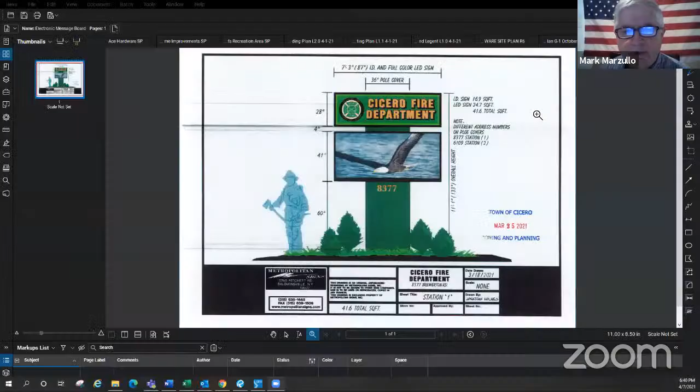Perfect. So that's a description of the sign, a visual of the sign.

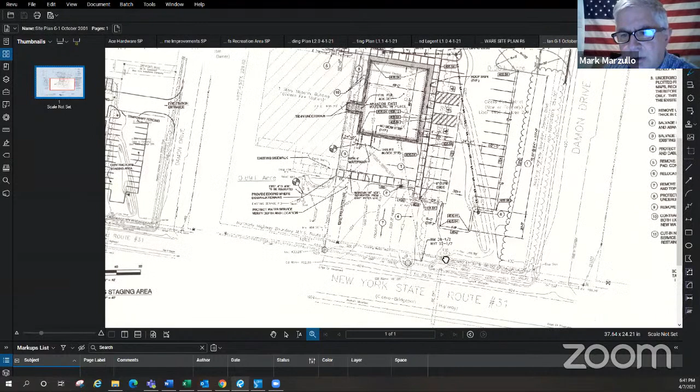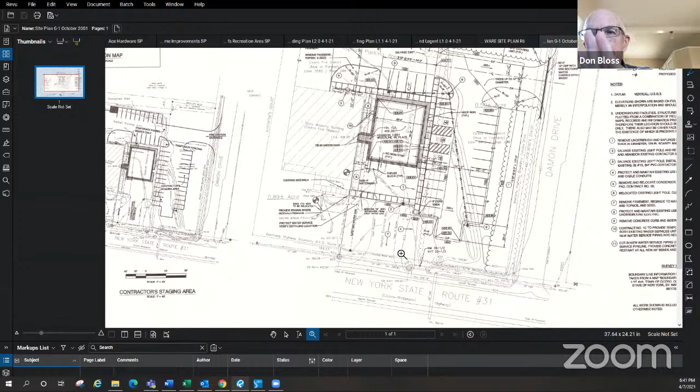Yeah, but is that Route 11? No, no, this is 31, the Route 31 Fire Department, the one over by Thompson Road. Yes, yeah - oh, wait, where Damon should be, excuse me, I was thinking of the fire barn on Route 11 and 31. Now I realize Damon Drive, that's the fire barn. I apologize, it's on Route 31.

No worries. Mark, can you point out where the existing sign is? It's in that plan - oh, right here. Darker - there you go, you found it.

Right there, okay, for an interval of less than 15 seconds there will be no flashing, oscillating, or scrolling of messages. The sign may be internally but not externally lit.

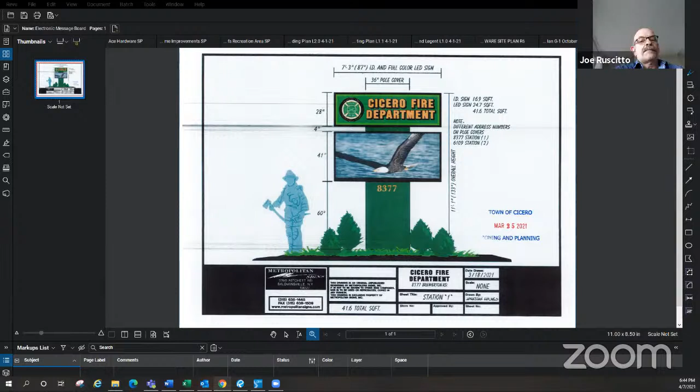Do we have a motion? Somebody like to make that a motion? I'll make it a motion. Do we have a second? Second by Snyder. Mr. Ruscitto, yes. Mr. Abbey, yes. Mr. Snyder, yes. Mr. Bloss, yes, and I vote yes.

John, you're all set. Just a quick question - Chuck brought up, if we were to redesign that top part and just include 'volunteer,' we're going to make a SEQR determination, and then I would anticipate a recommendation to the town board on the zone change.

The board has all received the Part 2 that was completed by Mr. Jermaine. Are there any questions? The matter has been determined to be a Type 1 action, and the applicant has completed a full environmental assessment form. This board, in accordance with its role as lead agency, has completed an investigation as to whether or not the proposed zone change may have a significant adverse impact on the environment as defined by SEQR.

And has been presented with and reviewed the proposed findings as set forth in Part 2. At this point, you would move for the adoption of a resolution approving the adoption of the findings as set forth under Part 2 of the full environmental assessment form, identification of potential impacts as presented to the board. Said Part 2 findings as presented shall be included in the record of this proceeding, and the town clerk...

So now our objective is to declare either a positive or a negative deck on this. That's correct, those are our only two options. We can't do a conditional.

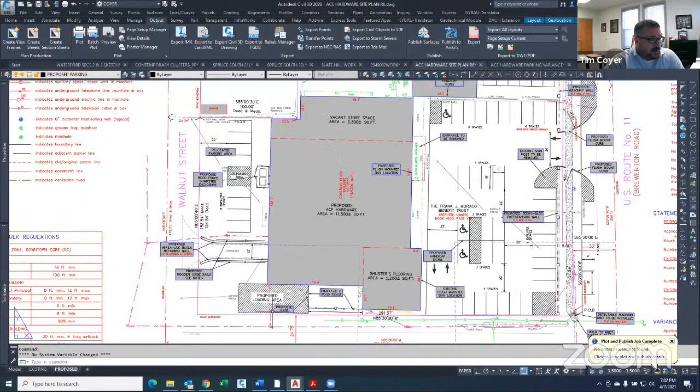After the previous meeting, we had a couple of comments from the board about the parking area in front of the dumpster enclosure in the back, so that the dump trucks can get through there without worrying about people parking in the way. We changed the location based on the changes we made.

We did talk to the state DOT about the proposed sidewalk out front. I sent them two options, and the existing curb was okay. I sent them the option of putting the sidewalk here because right now, where we have the sidewalk proposed in this plan, it goes through private property. The applicant's private property has an 8-foot jog here, it cuts out here and comes around, so I knew that would be an issue to deal with the state DOT.

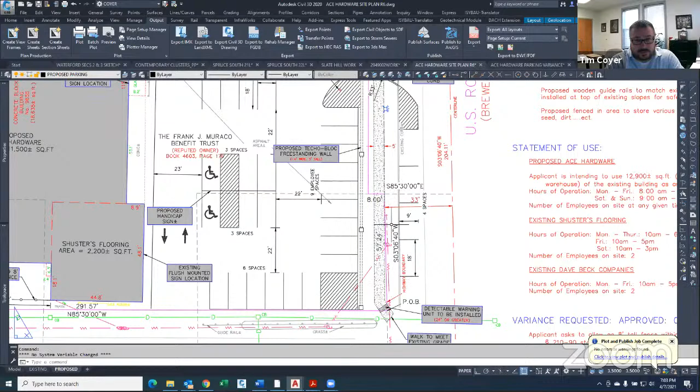So at first we sent this one outside the private property so we wouldn't have to deal with that problem with this option. However, the problem we're going to run into if this is where the sidewalk goes is we'll have to dedicate this to DOT. So even if this were approved, we wouldn't be able to start construction on the concrete walk out front until roughly a year from now, because we'd have to give this property to the state prior to any construction.

So that was the applicant's only concern: if a year from now when we go to start doing this, could we relook at the time frame for doing all those proposals in this area? I don't think it makes sense otherwise. The plan is to start this construction work within a reasonable amount of time.

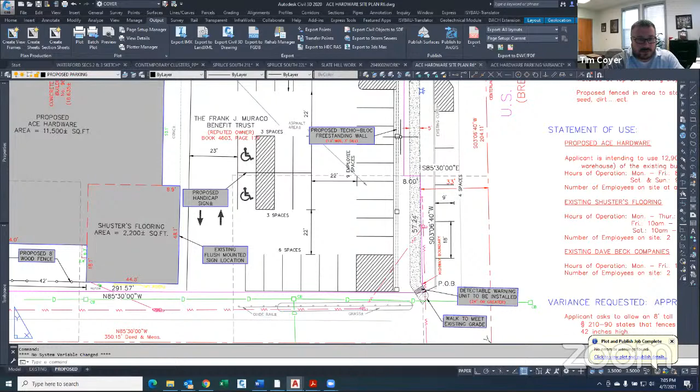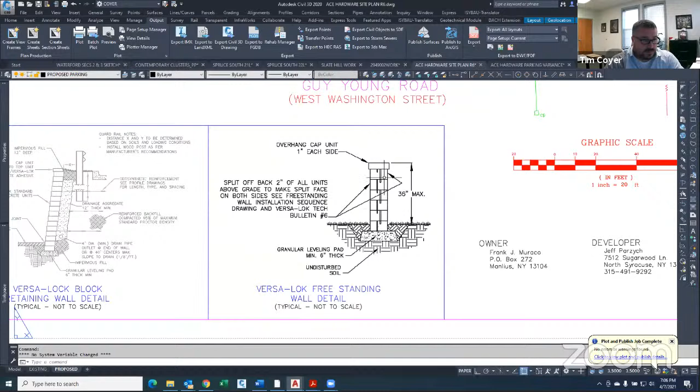One other change I didn't mention: I added details for the retaining wall out front. The original plan we sent in last week had a different detail for the wall running along Brewerton Road. It was brought up that the original wall didn't have interlocks through the wall courses, and it might not be structural enough to withstand plowing and similar stress. So our applicant talked to Northern Nurseries, explained the situation, and they suggested these interlocking reinforcements inside the blocks. They said it would be strong enough to hold up that type of wall at the existing ramp.

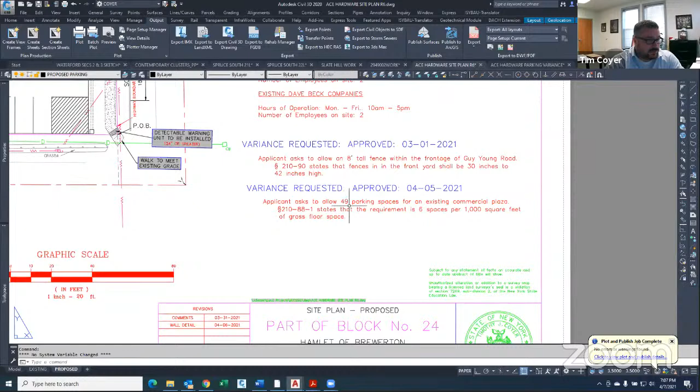I believe we finally got approvals Monday night, specifically for the two parking spaces down to 49, after we redesigned what we show on site. So that's been cleaned up as well. I believe that addresses all the changes to the map at this point.

Does the board have any questions for us? We'll open it to questions. Mr. Ruscitto?

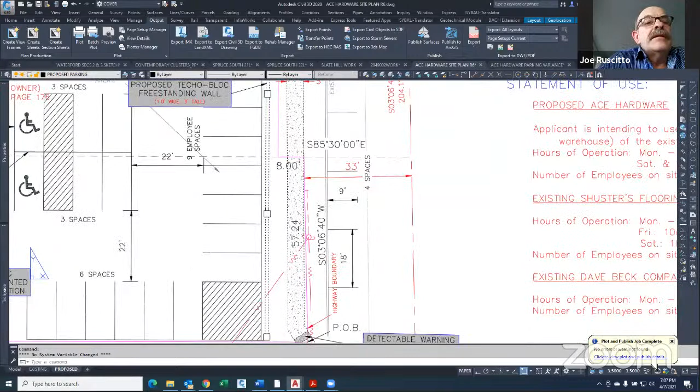The sidewalk, either way it ends up going, will it meet the hamlet's restrictions, since it falls in that gray area, so to speak? Does that meet what they want? As far as the sidewalk goes, there was a proposed sidewalk. I'll pull the regulations, but if I'm not mistaken there was a wooden post fence in there. Okay.

Mr. Abbey: the Hamlet of Brewerton's getting a nice hardware store and a nice update for that corner.

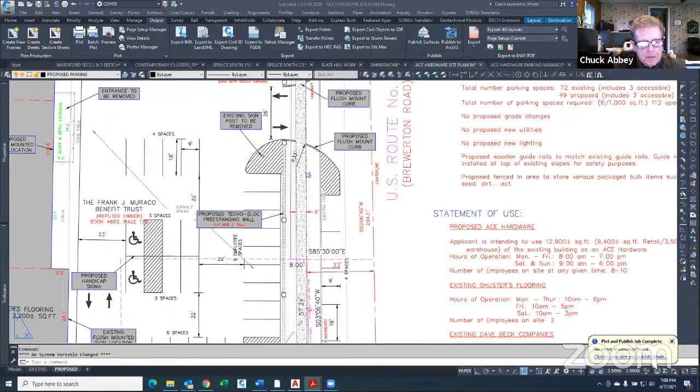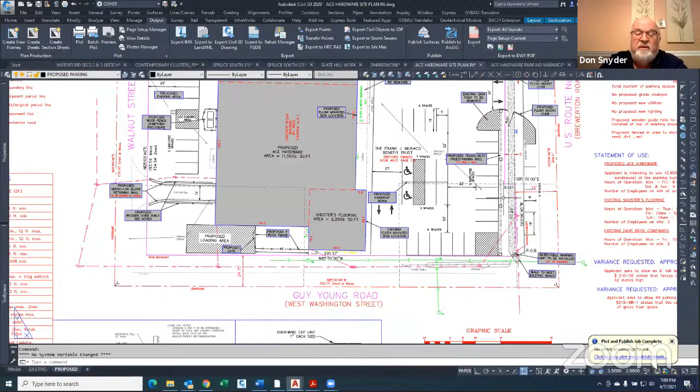Mr. Snyder: the loading dock in the back is fantastic, super. I really appreciate the way you've taken that by the hand. I don't have a problem with the sidewalk. If there's some way we can word the approval that is comfortable to Neil and to Steve, then I have no problem with the sidewalk either. So good job, thank you, Tim.

Mr. Bloss: I don't have any issues. I think it should be good to go. I like what they're doing in the village, and I'm all for it.

Thank you. Mr. Maurizio: I really like this project, so best of luck to you, Jeff.

Thank you, Michael. Mr. Procopio: I'm all set. If there's any question regarding the sidewalk, fashioning an approval to give them time to do that, I'm fine with that.

Great, Mr. Parrish? Yeah, I did send out a letter on this just as the meeting started. I thought I'd sent it out previously, but I hadn't. But I think between the board and Tim, they've really touched on any of the outstanding issues noted in there. So yeah, I'm good with it, and I would also be supportive of fashioning an approval that would, one, give the applicant time to negotiate with the state DOT to dedicate the land needed for the sidewalk construction. And once that's completed, revisit with the town the schedule for potentially the town or state undertaking those improvements, eliminating that from the project if it seems imminent.

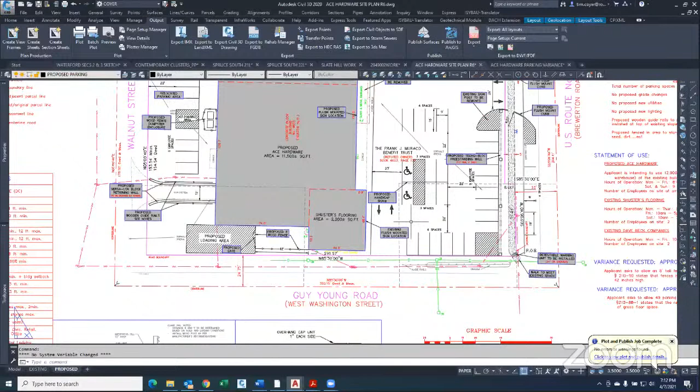Mr. Ruscitto, would you do the standard SEQR, please? Yes, I propose a standard SEQR, a form of motion. Do we have a second? Second, by Mr. Bloss. Mr. Ruscitto? Yes. Mr. Abbey? Yes. Mr. Snyder? Yes. Mr. Bloss? Yes. And I vote yes.

SEQR passes. Neil, would you propose a motion for approval, please?

I move for the adoption of a resolution approving the application known as Just Parzik, Brewerton Ace Hardware, 9655 Brewerton Road, proposed hardware store. This approval is strictly conditioned on the following: one, the color schemes, renderings, and elevations as presented by the applicant to the planning board shall be incorporated by reference into the site plan and the board's approval thereof; the actual project must substantially conform to the items as presented. Two, the board notes the applicant has explained they'll need to negotiate a dedication of the sidewalk area with the DOT, which may take additional time before constructing the sidewalk. The town will revisit the sidewalk issue with the applicant should the state aid in said improvements.

Would somebody like to make that a motion? I'll make that a motion. Motion by Mr. Ruscitto. Do we have a second? Second, by Mr. Bloss. Mr. Ruscitto? Yes. Mr. Abbey? Yes. Mr. Snyder? Yes. Mr. Bloss? Yes. And I vote yes.

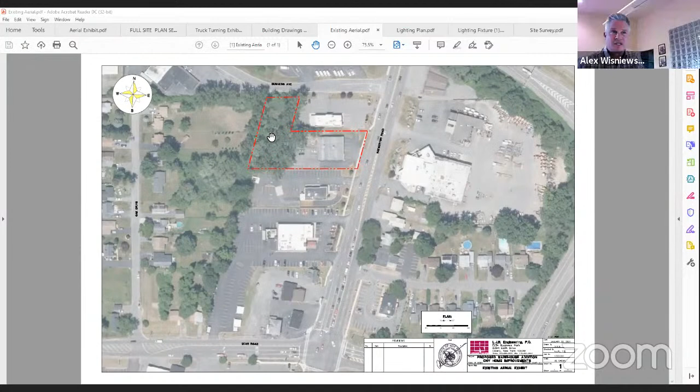Since last meeting, we were asked to prepare and provide detailed building elevations and renderings, which have been submitted. I can take you through those a little bit. Mark Parrish also had an opportunity to review my drawings from a technical standpoint and provided some comments, which we've since responded to, and Mark has issued a letter to that effect.

The building drawings show a 70 by 70 square foot existing structure in the front, and he'd like to construct a 125 by 70 foot warehouse addition off the back with essentially a breezeway connection between the two buildings. As we discussed last time, Mr. Dumond leases some space to a church group on the north side of the building.

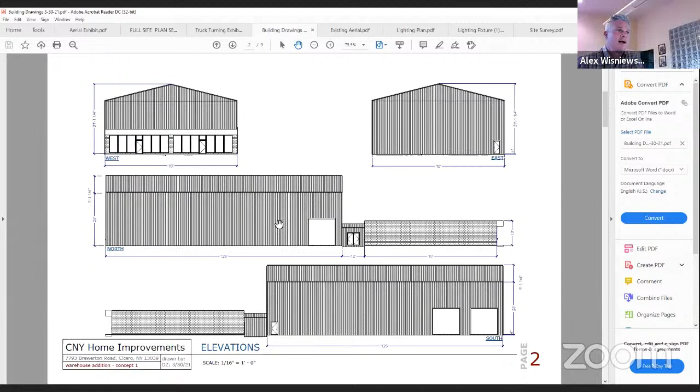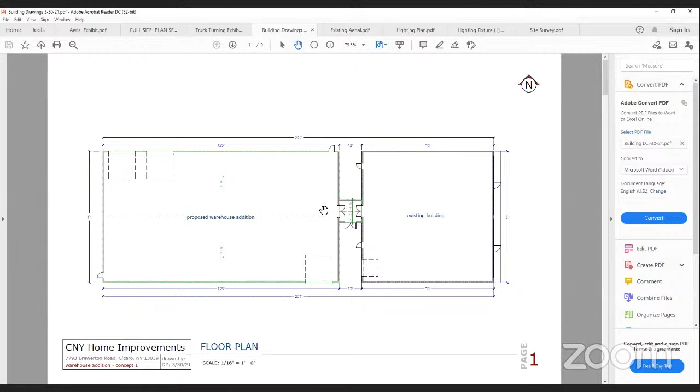It's proposed that there be two truck docks in the rear portion of the building. By exposing the foundation wall, since the grade of the site generally pitches from east to west, we're transitioning grade from roughly the same building elevation down to expose this dock at 4 feet at this point. This overhead garage door would be at grade, and as discussed, there would be an interconnection between the two buildings.

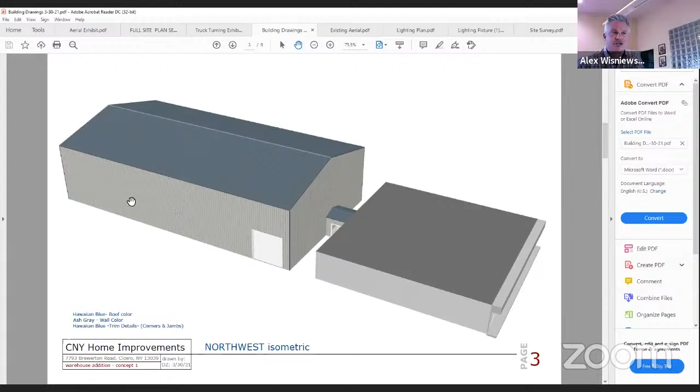Looking at the various perspective renderings, I know colors were part of the questions last time. The colors are indicated in the lower left corner. It's going to be a dark blue roof color with an ash gray wall color. This is kind of a perspective view looking at the front of the building, say from Route 11.

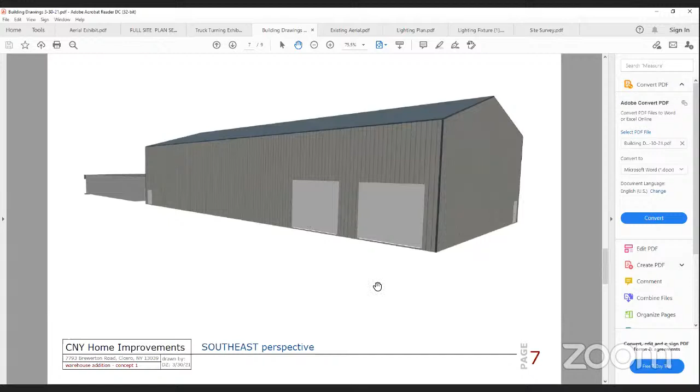This would be the view, as we discussed. The church patrons would walk along this face of the building to gain access—excuse me, I got that wrong. This is where the access drive would be on the south side of the building, and this would be the view from the other side of the building where the two loading docks would be. Again, another view from Route 11 there.

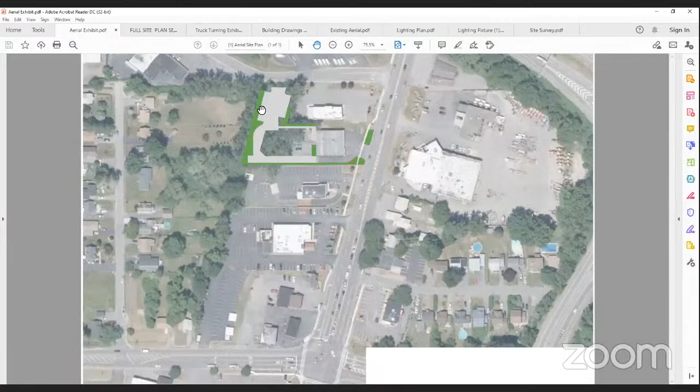As part of my response to Mark's comments, let's get to the updated exhibit here. Just a quick overview of the changes since the last plan.

Mark had suggested, and I like and appreciate the comment—originally we had the sidewalk tucked immediately adjacent to the north wall of the addition, and due to obviously snow cover and icicles and whatnot, it was suggested that we resolve that. So I brought that sidewalk out 6 feet away from the building now, and we wrapped it out and up to the parking area so that folks attending church services on Wednesday evenings and Sunday mornings can easily access the rear door. The front spaces are also available to them to enter from the front door as well.

Mark had also suggested that, if you recall, we had parking behind the building originally. He suggested we eliminate those spaces and ease these turning radii to allow truck vehicles to circulate the building. That's also reduced the amount of additional impervious surfaces we'll create there. I've also eliminated 3 more parking spaces we originally had here, since they would effectively be unusable if a truck was in a loading position. So we've also gained some additional green space by doing that.

Mark also recommended that we reduce the drive width on the south side of the building to provide for some additional snow storage between these two sites, and we've done that. So you've got roughly 5 feet to the property line and 8 feet from edge of pavement to the curb line of the Brick and Brew.

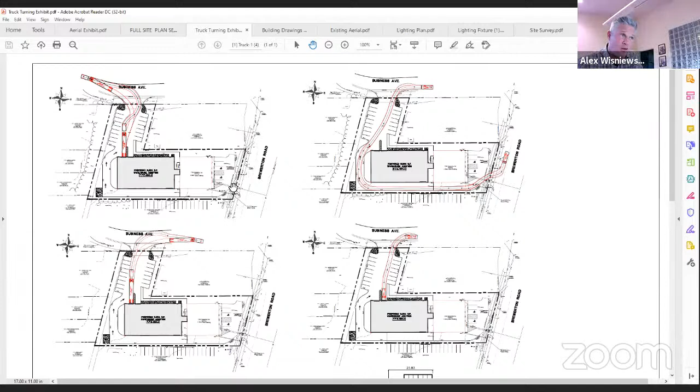This diagram on the left shows the event of a full-size tractor trailer, which I understand is very infrequent, but it shows how the vehicle can both back in from either direction and/or pull out onto Business Ave, which we feel is a huge improvement over the existing condition. Today, if tractor trailers try to deliver to this site, they can't negotiate this entrance, so they'll stop on the state highway, blocking traffic while unloading through the front door. We're trying to resolve that situation with this plan.

I think that's generally the extent of the changes in response to comments from our last meeting, as well as from Mr. Parrish. If there's any other questions, I'd be happy to try to answer those.

Thank you, Alex. We'll open up the questions, Mr. Aceto. No, it looks good, I think he's answered all the questions.

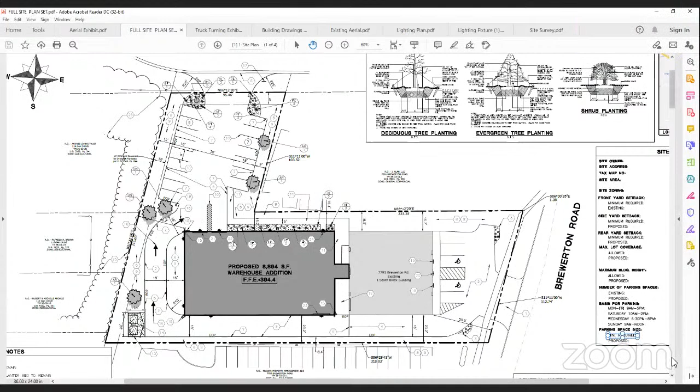Thank you. Mr. Abbey: Alex, you mentioned that at the present time, deliveries have to come in the front door. Let me go back to the existing conditions plan - there's the ability for smaller vehicles to come around the back of the building, although it's kind of a jumble of parking spaces. There are overhead doors on the back of the existing building where they can deliver. Tractor trailers, however, Chuck, cannot get into this driveway or back out, so if he ever does get a tractor trailer delivery, presently it's forced to stop on Brewerton Road and unload through the front door.

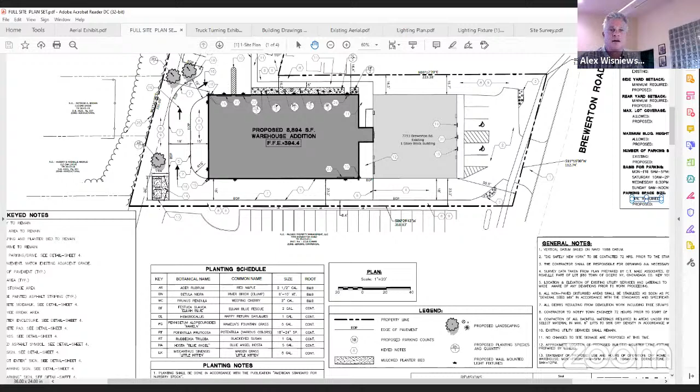And the plans for the dumpster area, is that to be enclosed? Yes, sir. So we're showing the dumpster enclosure now back in the back corner of the property. There's a detail for the enclosure included on this last sheet - typical 3-sided plus doors in the front, a swing gate, so that'd be fully enclosed on a concrete pad.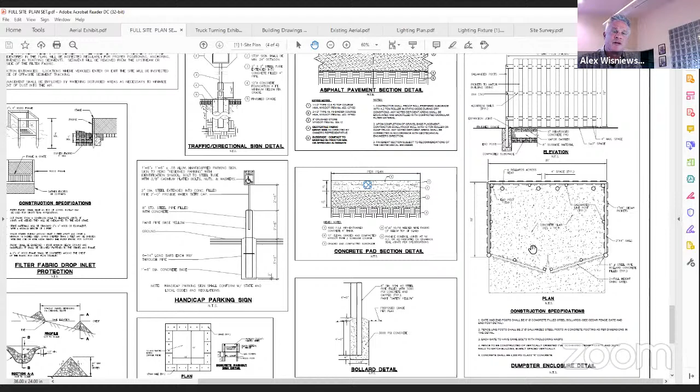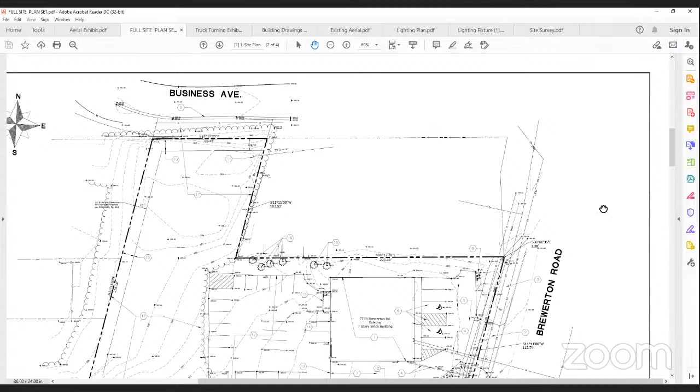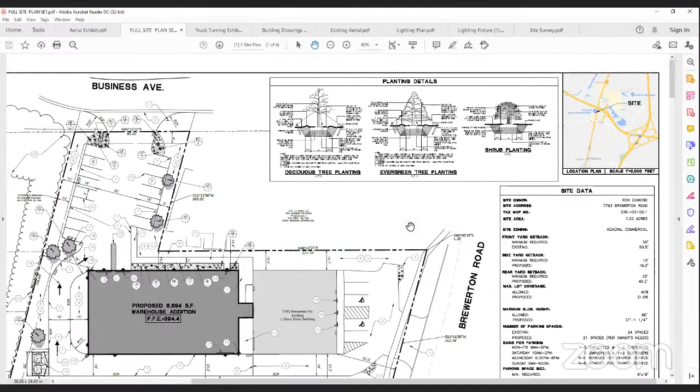Another thought - you mentioned they have some straight line trucks of their own. About how many? He's got 2, I believe. Ron, is that correct? Yeah, that's correct, we have 2. I'm just curious because trucks being longer than cars, around the back there's diagrammed out car parking, and I'm curious if the trucks would cause any blockage at different times. I'm just curious where he parks those 2 larger trucks. I think there's adequate space in the current loading position in one of the flank spaces. This drive aisle is wider than typical because we're trying to make sure we've got room for the infrequent opportunity for tractor trailers to pull in and out, so you have some additional depth to these spaces that's not really illustrated.

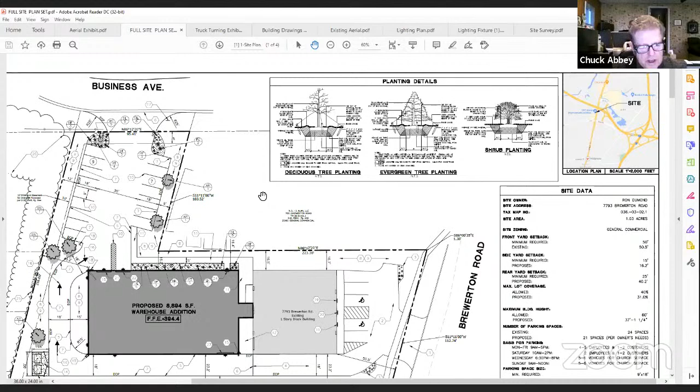One last thing - the new building proposal, does it have a second floor or is it 2-story, with the height of that? That's my understanding, Ron, you want to elaborate? I'm not sure if the second level is a mezzanine or an actual second story, but it's intended to store dry goods associated with the home improvement business. That's correct, for storage at the second level. I assume that's with the height of the building. Correct. That answers my questions.

Thanks, Alex, and appreciate it. Sure, thank you, Chuck.

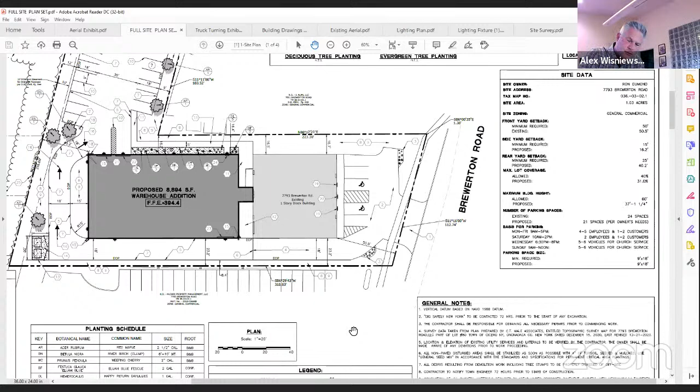Mr. Snyder: The only question I've gotten is for our engineer. If our engineer is happy with the drainage situation, then I'm okay. But I know we're taking what is a basin right now that water sits in, and we're turning it into parking lots. So I'm just wondering, Mark, do we have the capacity to take care of the water that we're going to create with the building and the additional hard surfaces?

Yes, in my opinion, we do. Alex has taken a look at this, and in relation to the overall drainage basin, the increase in impervious area is pretty small. There's probably over 15 acres worth of area that drains here, and maybe just about a third of an acre of impervious area. Plus, this is right at the bottom of the watershed, so by the time the main runoff hits from the overall watershed, the water from this area would really be gone and down through the system.

Okay, so this water goes to somebody else's property? It goes to, you can see on the top of this plan Alex has up, there's an existing 30-inch diameter culvert right there. The stormwater currently comes down, and there's a swale along the west side of the site. It comes and would turn along the swale along Business Avenue and get into that culvert, then flow out to the state DOT system. What they're proposing is to move that inlet to the west side of their property, putting in a new 30-inch culvert. So essentially you have the same drainage pattern as you currently have.

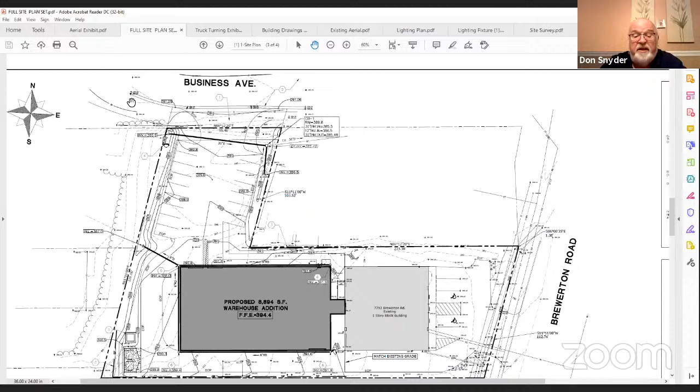Yeah, and now that you see it, you probably might want to put it on the south side of the building too. They're not generally real expensive if you do it when the building is being built. Okay, got it. Other than that, it looks great. Appreciate that, thank you, Donald. Mr. Bloss? I'm all set.

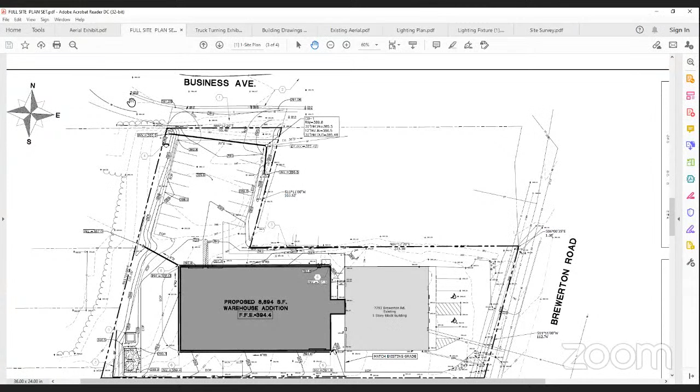I want to talk about that cross connection. Initially I was under the impression there wasn't a cross connection on the property to the south, but according to Mr. Parrish's reviews, that cross connection does exist. What's there presently, Mark, is they basically allowed for a future connection. You can see on the plan here - let me zoom in a little more - the outline, this is all curb parking here, and they've got an island.

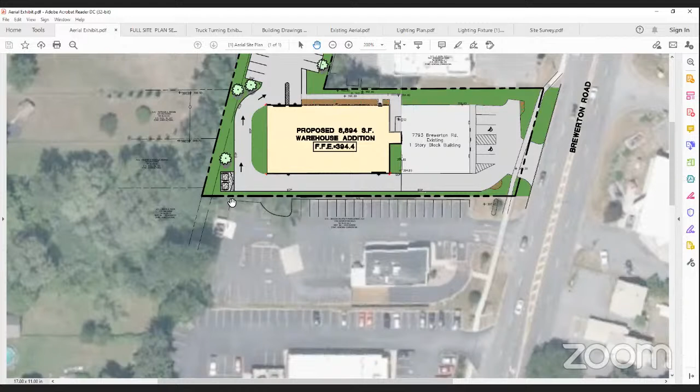This is curb, and then this is just an edge of pavement, and that wraps back around the west side of the building. Their dumpsters are here, so a connection could easily be made, but envision - if this is your business, would you want people coming in and out through the back of your business after having a few beers? So it's a safety and security concern, frankly.

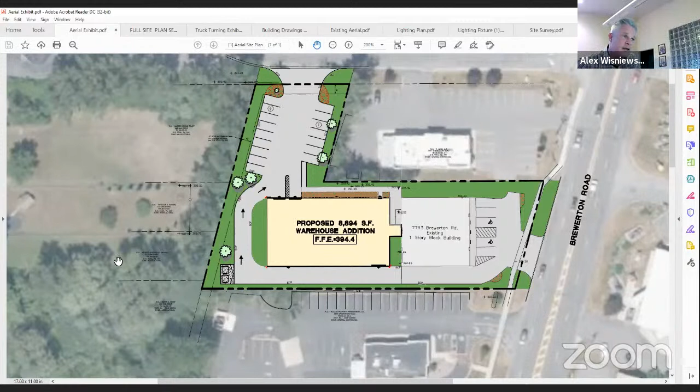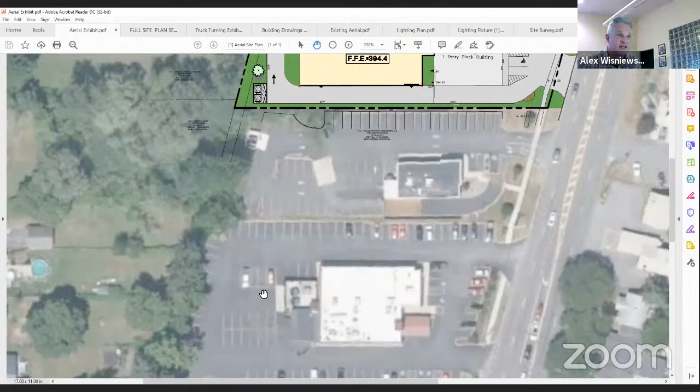And the other concern, I know this goes back a ways - if for whatever reason you started to have interconnections between all these sites, next thing you know you're connected to Bear Road, and this becomes a major thoroughfare. So for that reason, my client is opposed to that. And I understand that - we're charged with good planning.

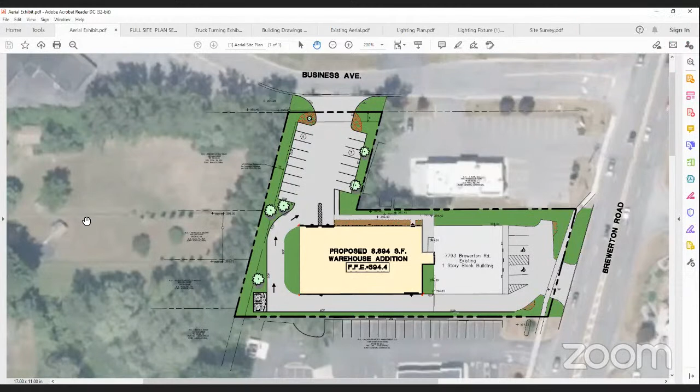Some time ago, I don't know if Mr. Parrish would remember, there was a study done maybe by Metropolitan Transportation in this area. They talked about the cross connection and the importance of it. The objective is to minimize traffic on Route 11 as much as possible, minimize impact on Route 11.

For people who are just cutting across from one spot to another, when the property to the south went through site plan, we required it with anticipation of someday being able to connect it. For me, I think that's good planning for everybody. The cross connections on other parts of Route 11 help this property, and this property's cross connection would potentially help other properties in this neighborhood.

So it's all about that traffic on Route 11, right? And the vision has been all along to put these cross connections in where possible. It was envisioned to have that cross connection there. And I think it's important—if I don't see a cross connection there, I'm a no vote. That's how important it is to me.

Mark, I think that's a great idea. And the thing is, I'm sure the restaurant and the people having a couple of beers might not even coincide with the operation of the CNY group. Obviously, at that connection where you go across lots, there certainly could be a traffic bump at that point. So we would make sure that people don't go from the Brick and Brew onto the proposed warehouse space at 50 miles an hour—they're going to lose their muffler or something.

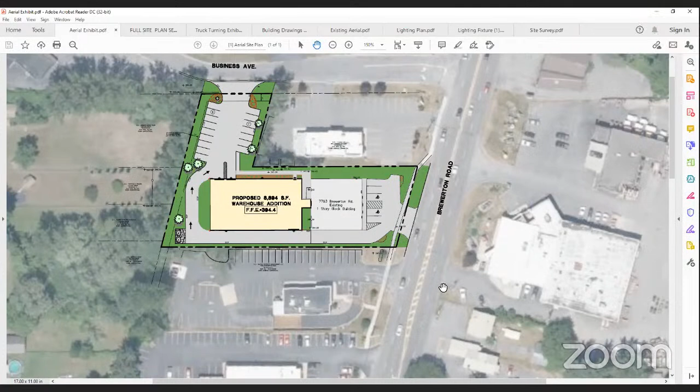A cross access easement just allows vehicle or traffic to go through any property, whether it's a bar or a restaurant or whatever is next. One of the theories is that if there's somebody at one of the sites to the south, and they want to go to a site a little bit north, they don't have to go out on Route 11 and back in.

They can go along the back cross access connection. Right now it's just to the property directly to the south, but our intent would be, when we have an opportunity like we do here, to get that cross connection at the next site as well—which brings me to another point: the one-way may not work either for a decent cross connection.

With that, Mark, I'm going to open it up to you and see what thoughts you might have. Mr. Parrish.

Yeah, I mean, again, as far as the cross connection goes, I think everything else you've discussed as far as the review goes, I think we're good with everything. As far as this cross connection goes, I do think it provides an opportunity for customers at the Brick and Brew to make a legal left-hand turn by utilizing that.

I think the one way is probably sufficient, because the benefit is the ability to make a legal left-hand turn from there. We've tried for cross connections with the Copper Top property, but that hasn't happened. I'm not sure it'll extend beyond here to open up to business or to Bear Road anytime soon. So that's my opinion on this subject.

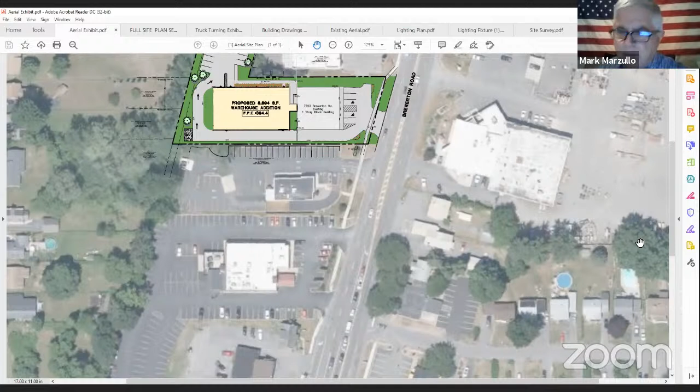All right, thanks, Mark. I still think it would be important to have, and we'll see what happens with the vote. Does anybody else have any comments on this?

Can I jump in again? This is Ron. So Neil, then pretty much the way this would work is I would have to have an easement on my property, and that would be permanent. That's kind of a big deal too.

That's correct. And Ron, that's what happened with your adjoining neighbor's property. You're effectively devaluing your property, and the Brick and Brew is increasing value to their property at your cost. Would Brick and Brew be interested in compensating you for an easement? Would they allow you to access your site via their site?

Hold on a second. You're outside the scope of what we're discussing. I'm not interested in this discussion. What we're looking to do is improve the traffic pattern for the overall location, and that's really all I'm going to get into. Alex, can you pull up the street view for this property, please?

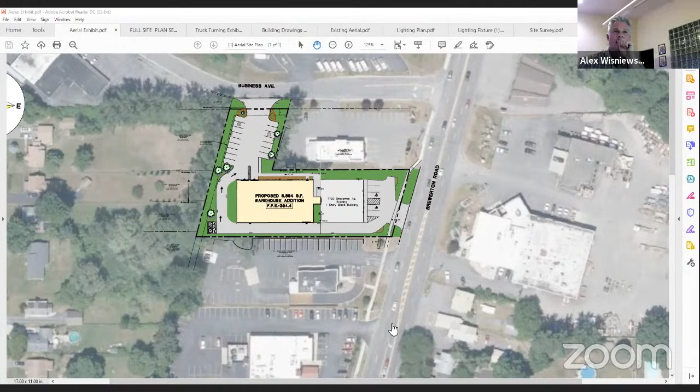Everyone see that? No, not yet. We still got the site map on. Let me try this... I cannot get to that screen for some reason. Still the same.

Chairman, while we're waiting, if I could just go back to something you said earlier about a possible no vote. I just want to point out that it wouldn't necessarily have to be a no vote, because a vote could be conditioned on the actual granting of the easement. So it could be a positive vote with that condition, depending on how you did the motion.

Mr. Parrish, can you try and get the street view from Google? Alex, you might have to unshare your screen and reshare it. I'm trying. I can't get back to the... cannot get back to the... there we go. Share screen. Oh, here we go. You see that? There it is.

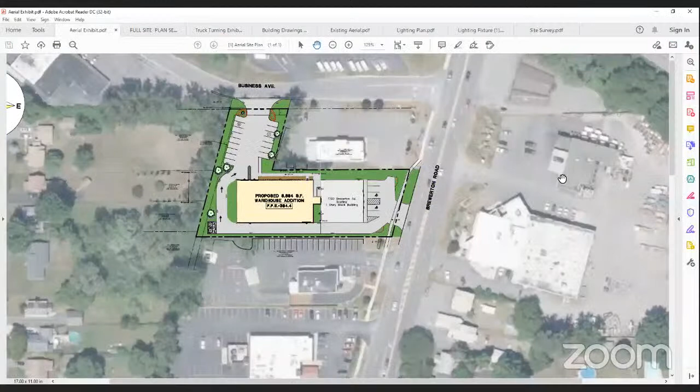Okay, so Neil, relative to the landscaping, is that something we can do conditioned on maybe Mark's approval, or how can we handle that if we move forward tonight? I mean, I guess you might be able to describe it along the lines of landscaping will be added to the front of the site to improve the overall appearance and make it consistent with the adjoining property. Are you comfortable with that, or should we wait?

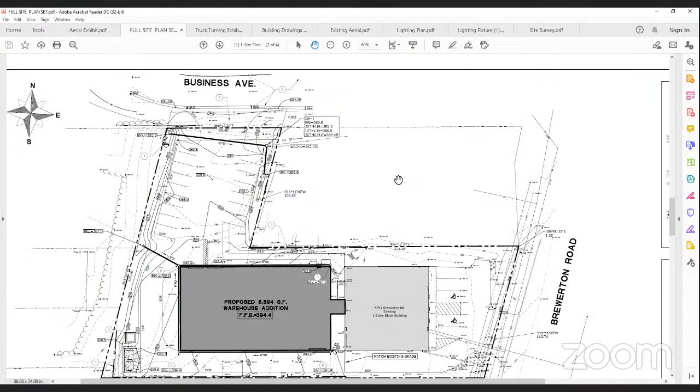It's totally up to you. I mean, because that doesn't give you much to enforce. You can wait and ask the applicant to provide a more detailed landscaping plan. I mean, whatever I come up with is going to be very subjective because you don't have anything concrete to look at. There's no plan to say you're going to put the tree, landscaping here, of this nature and this type.

So it depends on your feeling about it, as far as, are you comfortable that the applicant's going to be able to put appropriate landscaping there, or do you want to see it on a plan so you know what you're actually getting? Otherwise, it's buyer beware. Yeah, we always want to see it. Alex, would you be all right with coming back in 2 weeks?

I guess if that's our only option, I guess, Mark, if you trust me, I mean, we can, I think we'd like to keep this area open for snow storage and removal, but I think we can fill from really the back edge of the sidewalk to the pavement line with a landscape bed and do something more similar to what I've done to dress up the new entrance back here. If you trust my taste.

I absolutely trust you. My only concern is what we've done in the past and what we're going to do in the future. We always require that we see it on the plan specifically. So if we modify from that this time, I don't like the precedent it sets. But I absolutely trust you.

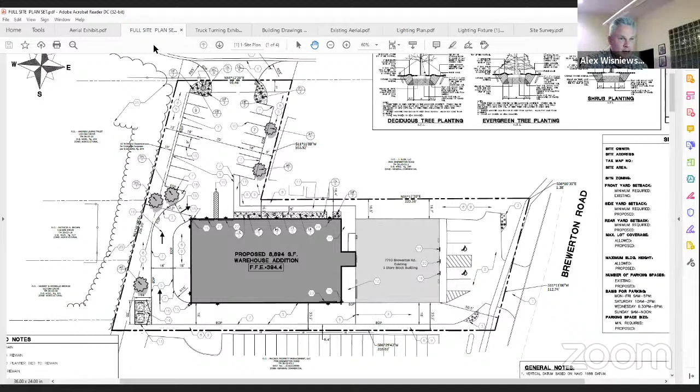Appreciate that. Ron, what's your timeline? Is 2 more weeks gonna kill you? Is there any way we can duplicate something that we have on the plan already and show it in the notes here to do right in the front of the building? Know that I don't have nearly as much landscape there as these adjacent places to me, just so that you know, because our parking lot comes out further there.

But I'm happy to fill it all up with landscaping there, any types of shrubs or trees or anything that you want. I would hate for the project to be held up for a couple of weeks to do the site work based on that. Again, I want everybody to be pleased.

I'm glad to do anything that you ask for in regards to landscaping. If we state now specifically what you want, certain trees or shrubs or anything there, I'm happy to do it. That to me is very simple. That's easy, and I'd like to dress it up anyway. So, now's the time of year to do it.

Could we make it conditioned on my review? Sure, I suppose review and approval by the planning board chairman. Are we going to make this thing... is there an overall feeling that it's going to be conditioned on an easement anyway? I'm going to have you make that motion, yes. Okay.

So maybe you want to actually see that on the plan. You can kill two birds with one stone and see it on the plan. Otherwise, you're relying on Mark and I to say where that easement is and all that.

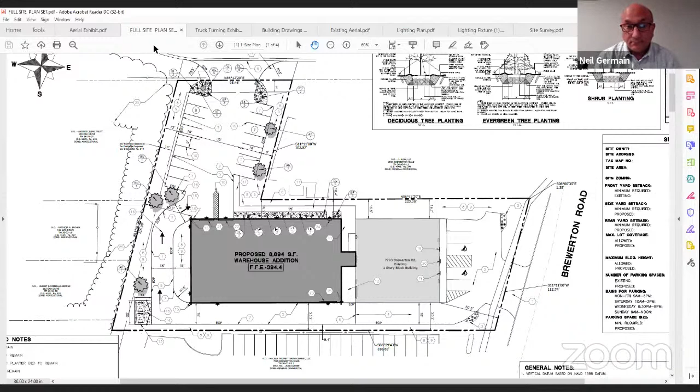Ron, do you understand the choice before you? Yeah, so is it pretty much the position that everybody feels that we need to do an easement here? That I need to put an easement on my property? Because that definitely affects the value of it, I think, for sure.

And could there be some sort of tax credit for a certain period of years, maybe not getting— I don't mean to jump in and interrupt you, but the answer to that is pretty much no.

When we evaluate a site plan, it's the policy of this board to ask for interconnection and cross-access easements. To not take it here would be an exception to that policy. Your speculation as to what it does to the value of your property doesn't affect the planning board's need to determine how the site is going to work and to make an overall good plan for the town.

Sure, and I understand. What if we did do an opening there and tried it out and saw how it went? I'm sorry, but there's no tryout with a permanent easement.

The purpose of the easement is to allow access from property to property. That's what the planning board has insisted on numerous occasions, to allow for interconnection. And there's really no trial period for it where we reevaluate it.

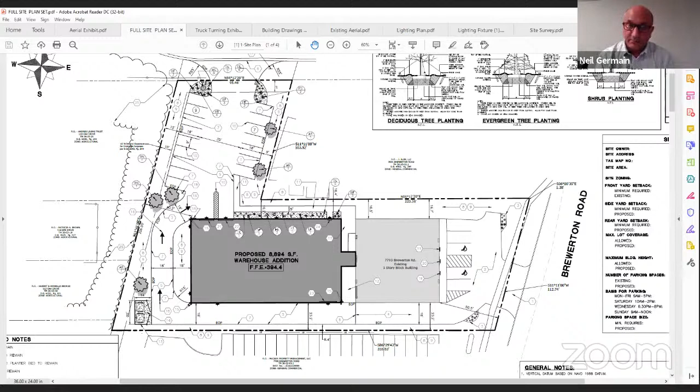Chairman, if I'm misstating your position, let me know. No, you're 100%. So, Neil, can we take a poll from the board on that cross connection? Sure, you can just take a quick straw poll on how everybody feels about it. Mr. Ruscitto, would you support?

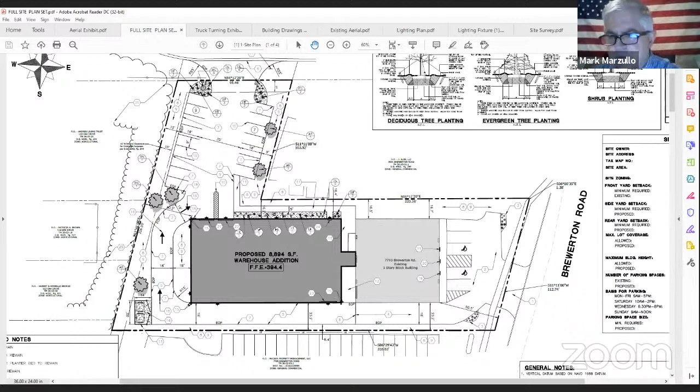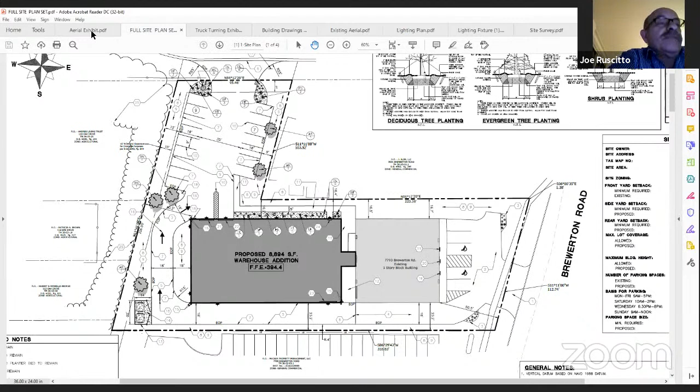Well, I have a comment. I know what we've done in the past, and I'd like to be consistent. I can see Ron's position. I'm looking at this, trying to figure if there was a way you could go around the front of the building. I understand his position with people at night stealing things, whatever.

But we always do insist on cross easements. We could put up a barrier there—a big speed bump, that might deter. Not everyone's going to even really know it's there, not going to have a big sign. But we pretty much have to be consistent with what we do. Otherwise it opens up to problems down the road.

But I do understand your concern, and it may or may not devalue your property. It might be an asset for the next person down the road. I can't say that, but I do understand your position. But we have one to maintain also.

Mr. Abbey, would you want to see a cross connection there? Yeah, I would support that. Mr. Snyder, you've already spoken. I support the cross connection. Mr. Bloss? I would like to see a cross connection, yes.

So there you have it. You have a unanimous board wanting that cross connection.

So Ron, if you ask for a vote without that, it sounds like you're going to get denied. If they're willing to give you a conditional approval condition upon that easement, maybe we could avoid the two-week delay in coming back, or we don't ask for any action tonight and give you some time to think about it or talk to your attorney.

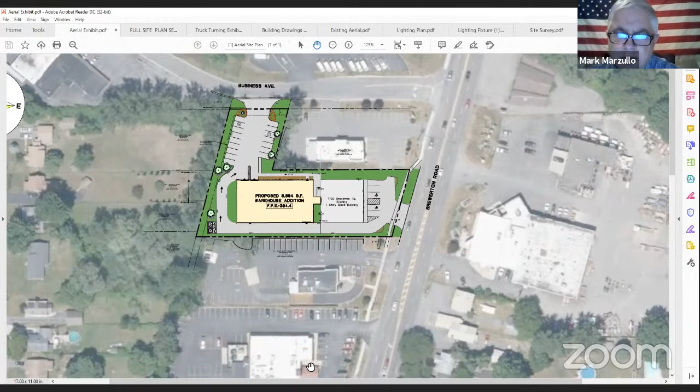But I don't want to hold you up. You've been very cooperative here, and I'm willing to work with the attorney to put a motion in place, conditioned on the cross connection and conditioned on the landscaping being improved. So I'm willing to. That would be.

Mr. Chairman? Yes. So can we also, if the board decides to go that way, also make part of that condition that this plan gets amended and updated to show that connection for construction?

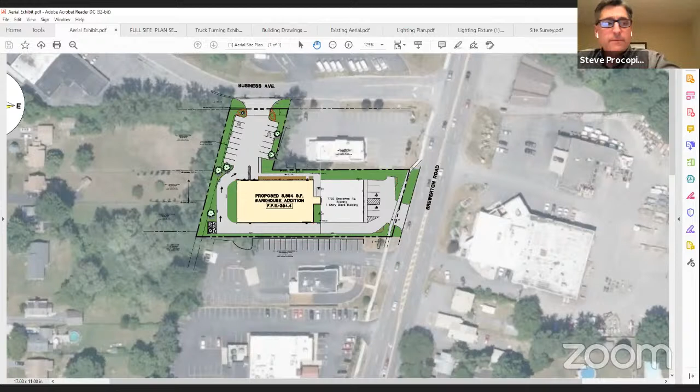Absolutely. Thank you. So I'm still nervous about approving this without it all being shown on the plan, Neil, but I will leave it to you to come up with some language that you're comfortable with, assuming you recommend that, so we can move forward.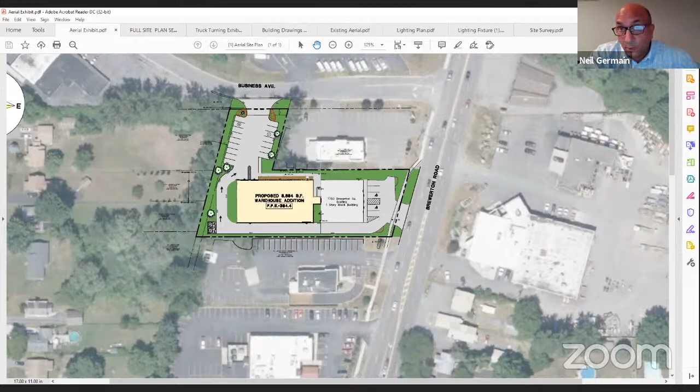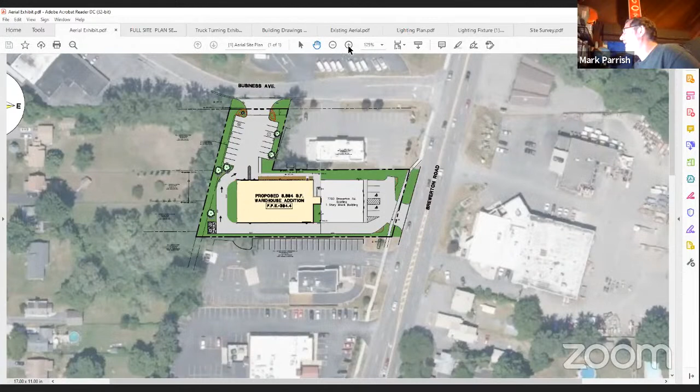So Neil, you think there's presently an easement across the back of Brick and Brew? I believe so. There is, according to Mr. Parrish. Yeah. No, I don't know that there's an easement. What I do know is there's an interconnect, that the design of the layout for the site allows for that connection physically. If you look at the current layout or current striping, there actually are three parking spots in that location where that little bump out is shown on Alex's plan there.

If you go to Google Earth, you'll see that there's actually 3 parking spaces there. So it may be, and I don't know if this will make a difference in the board's decision as to the provision of the easement, but it might be a good idea to contact the owner of the Brick and Brew, and discuss this with them to make sure they are desirous of this interconnection. I can do that. I can talk with them.

I like to say that because it's physically set up to do it, but again, I think the parking on that site is pretty tight. Right now they're utilizing that for 3 parking spaces. Alex, can you go to the aerial again there?

Not to throw another wrinkle into this, but it probably would be a good idea to contact them and make sure that they're okay with it. Go to the aerial view. So Mark, you don't know if a cross connection easement was in place? Well, no, again, they wouldn't need an easement unless we want to allow the CNY home improvement property to access onto the Brick and Brew property. I'm not sure that makes much sense, but they're first in the line. So I think you just need to go to the aerial view, Alex.

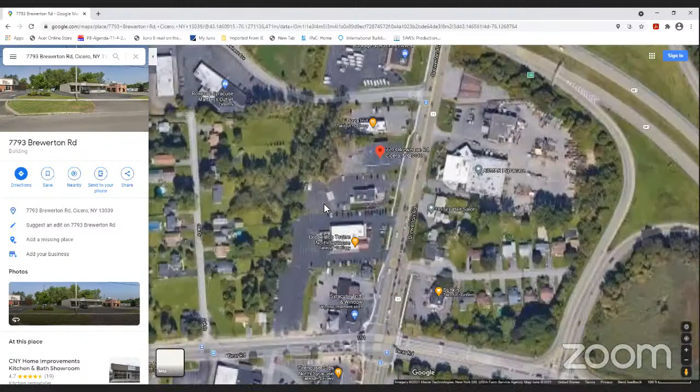I believe this was addressed with the Tim Hortons site plan. I'd have to go back in the records, but I thought there were some efforts taken by Tim Hortons at the time to create that cross access. They pledged to work with the previous owner of where CNY is now. They just weren't able to negotiate access, I think that's correct.

Yeah, so you can see there's 3 parking spaces in there right now occupying that area. But you can also see it's striped out and there's curbing there that would provide for that connection physically. And similarly, it looks like you could easily make a cross connection at this point too. So the site was laid out for that. I really don't recall whether or not they ceded an easement across there. That I do not remember.

My best guess is that we did, but I don't know for certain. So, where does that leave us with the motion? You still have the motion in place that he has to provide a cross access easement approvable by the planning board attorney, and they're going to have to show it on the map and the site plan. And if that cross connection easement does exist at the property to the south, that they would construct the pathway through, constructed accordingly.

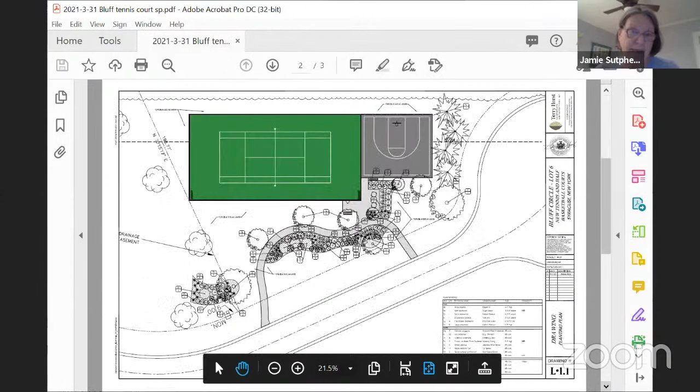So we prepared a planting plan and a grading plan. We added a planting plan with plant list, and then finally a grading plan showing the grades for the proposed facilities and the fence detail. I think we noted originally that it was 12 feet, but it really is a 10-foot high fence. That's a standard tennis court fence.

Thank you. We'll open up questions. Mr. Rosito, are you back yet? Mr. Abbey? Question on the signage. Where is it and what is it? We are not proposing signage.

Oh, okay, I didn't do that. Thank you. Yeah, we're noting that we're not proposing signage. That was what Mark asked to have written on the plan. All right, thank you. Thank you, Chuck.

Mr. Snyder? Yeah, I think it's great. I just think we're going to have a problem with no signage. There's going to be some shouting matches between the children that use this and the adults that control it. But that's not my problem.

So let's go. Mr. Bloss? No further questions. Mr. Marizio? No questions. And Joe's back.

My Wi-Fi went down. I did vote yes.

Joe, any questions on this? No, I'm all set. Thank you. Mr. Procopio? I'm all set. Thank you.

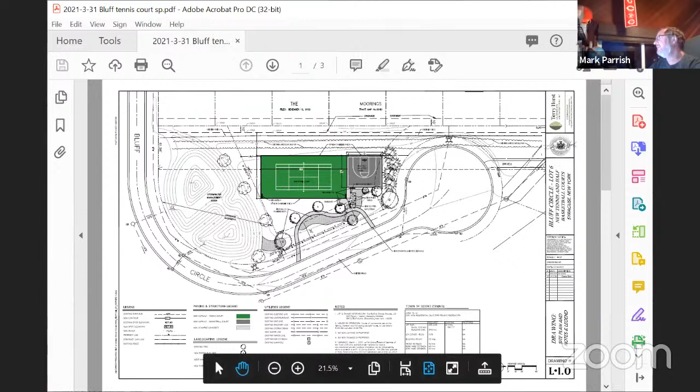Mr. Parrish? No comments here. Just Terry, I think you do have one note on the bottom of the tennis court. It still says 12-foot high fence there if you zoom in. Is it on this plan, Mark, on the first sheet? I think so, yeah. Okay. But the other one on top says 10-foot high and the details say 10-foot high, so you might want to reaffirm in the approval that it's a 10-foot high fence. Thank you, Mark. Mr. Germain?

No, all set. Joe, would you propose the standard SEQR, please? Yes, I propose our standard SEQR, and that's the form of motion. Do you have a second? Second. Seconded by Mr. Snyder. Mr. Rosito? Yes. Mr. Abbey? Yes. Mr. Snyder? Yes. Mr. Bloss? Yes. And I vote yes.

SEQR passes. Neil, would you propose a motion for approval? Yes, you're going to move for the adoption of a resolution approving the application known as the Bluffs at Oneida Shores LLC, 9475 Bluff Circle, proposed private recreational use tennis court and basketball, strictly on the following conditions: one, the color schemes, renderings, and elevations as presented by the applicant to the planning board shall be incorporated by reference into the site plan and the board's approval thereof. The actual project must substantially conform to the items as presented herein. Two, the fence will be 10-foot high. The note for the 12-foot on the plan is hereby amended accordingly.

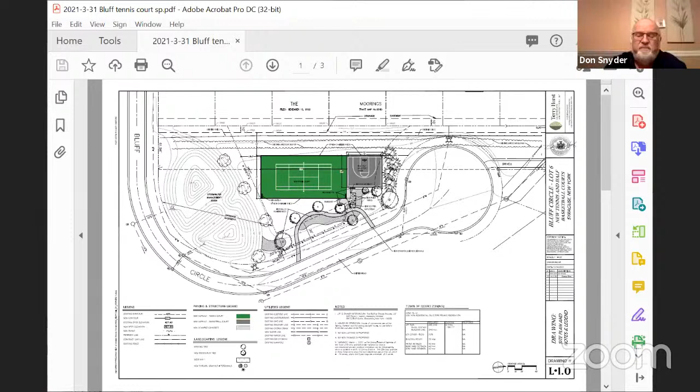Would somebody like to make that in form of a motion? So moved by Mr. Abbey. Do we have a second? Second by Mr. Rosito. Mr. Rosito? Yes. Mr. Abbey? Yes. Mr. Snyder? Yes. Mr. Bloss? Yes. And I vote yes. Site plan is approved. Good luck with it. Thank you. Have fun.

That concludes our agenda items. Anybody have any discussion they would like to chat about?

Mark, did the board approve the change for extending site plans? The town board, yeah, did they approve that change? Nancy's shaking her head. Yes, Nancy? Yes, we did. Okay, because I'm thinking, isn't Myers RV going to come look for an extension pretty quick? Because it's got to be almost a year or more since they put in for their site plan.

You're asking Nancy? You know, Steve, whether... yeah, that has expired. And I believe, if I remember correctly, they may have asked for an extension that was denied. I don't recall, but it's expired. They need a new site plan approval if I'm not mistaken. Did we say no on extension, Mark? That site plan approval was from probably 2019 or earlier. I have to go back down and check the records. Okay, yeah, I think it expired.